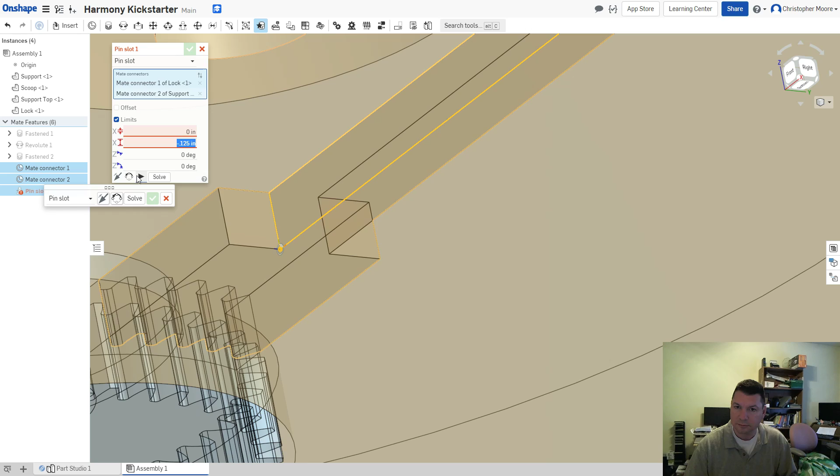Wow, okay, that is not what I thought. There we go.

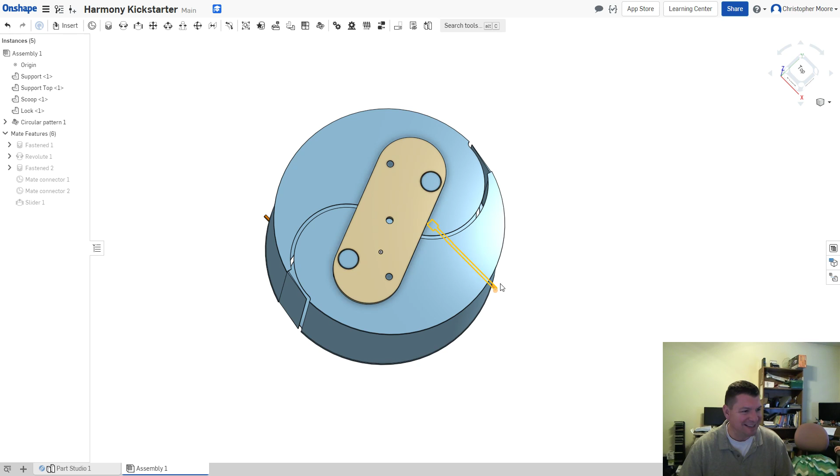Bless you. Excuse me. Bless you. Sorry. Damn coronavirus. You'd be coughing, not sneezing. Mark said it sounds like it. All right.

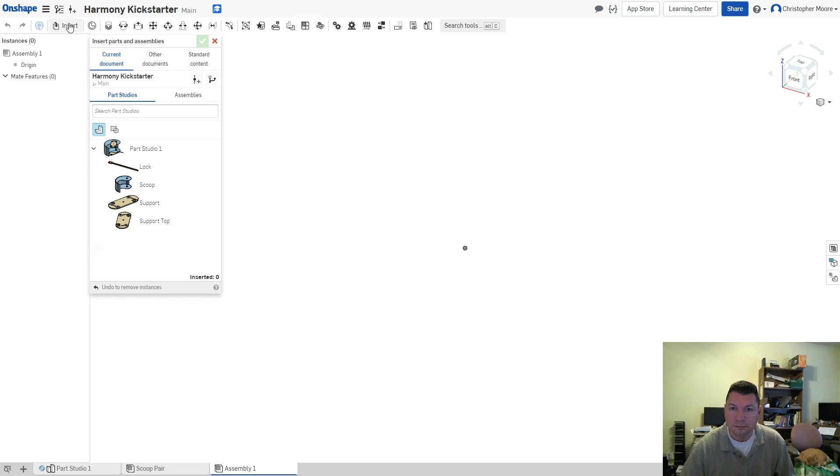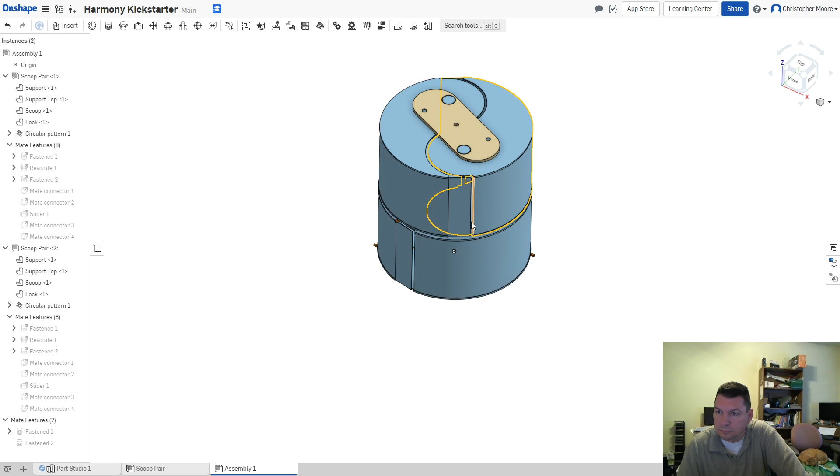Okay. Let's see how that works. That's looking better.

A variable vertical axis wind turbine, VVAWT. I like it, Frederick. Speak to those advantages a little bit more. I do like the sound of that.

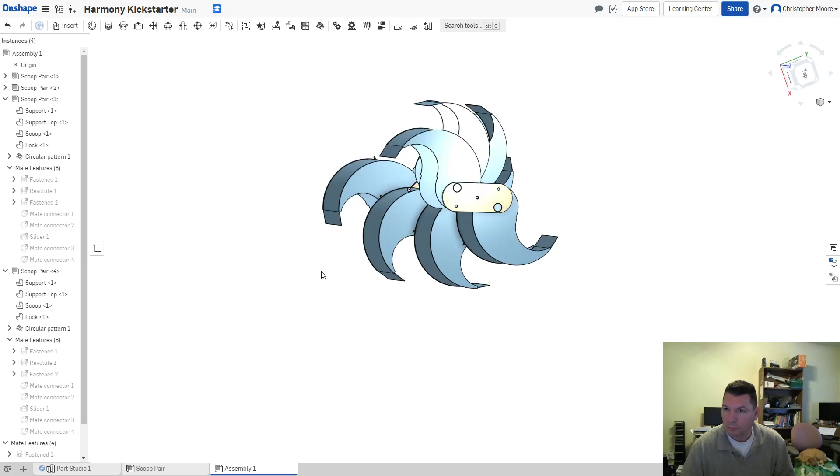All right. Yeah, if I could do a linear pattern, it would be interesting, because I could close everything up together, but this little test unit's not going to be able to do that.

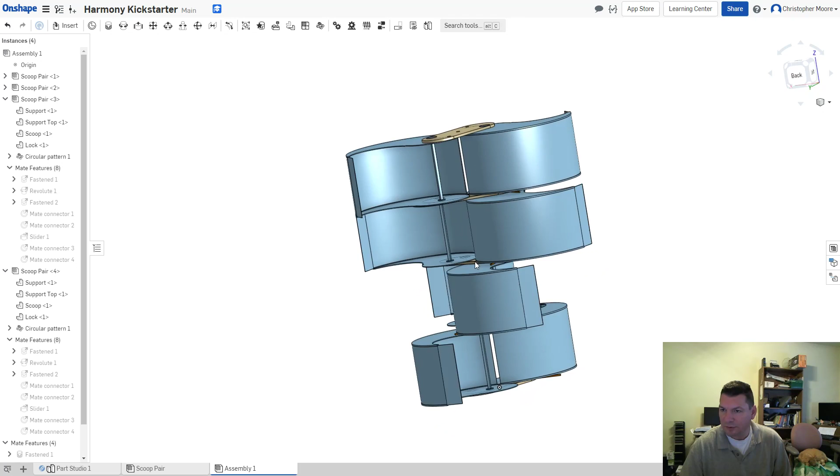And I'm not sure if I like the fact that you would have to use these sliders. I don't know, what do you guys think? It's going to allow the little test unit to have some really different characteristics than the full-sized unit, because you could have the scoops open at different angles, which really isn't going to be allowed in the full-sized unit.

But unless I have a full set of gears going through everything, which is impractical in the little tiny model, then you can't really do that.

It's funny, this one is created with the helix going opposite of how I have the big version. Each scoop, instead of it peeling away going up, I have it coming forward, which messes with my mind a little bit because it's opposite of how the big one is. It really shouldn't matter as far as performance goes, but it just is a little bit weird.

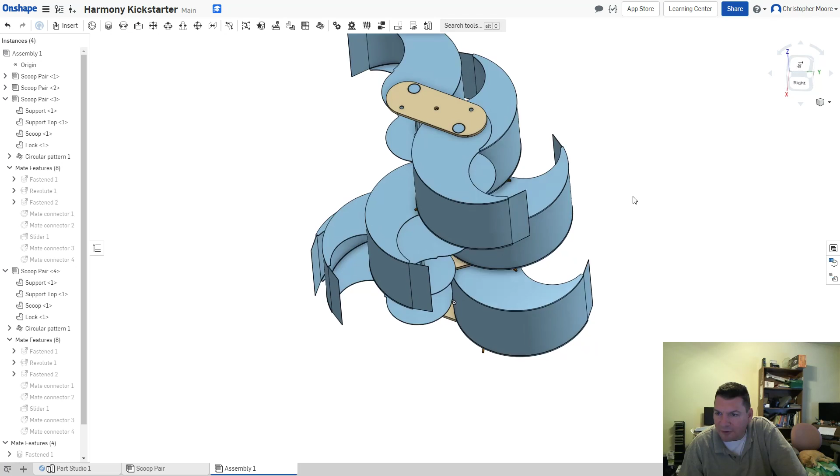So, Mark, each one has its own furling pin. You see, each scoop itself in this little model has its own furling pin or locking pin. I don't know how to do it in this little model any other way, because we've got to reduce the number of moving parts. We've got to simplify it. We have to keep this as simple as possible.

So when you think about putting this together, you would assemble a scoop pair just like this. It would be a top, a bottom, the little spindle-like lock on the top, or the circle, and the gear on the bottom. So there's a number of parts that would have to be assembled.

I can't send it through the mail fully assembled, because then, well, we could, but for us to assemble everything, we would need a much larger box. It would risk getting crushed or getting hurt. By keeping all the components flat, we can ship it in a much smaller box, keep it flat, keep what we have to do down to a minimum.

And I think if I make several good assembly videos, you could really have this assembled inside of 15-20 minutes, half hour max. It wouldn't be much to put this little model together to have your working little Harmony prototype.

I think the kit makes more sense too, Frederick, but that's why I'm modeling it here in 3D, to see, as I put it together, what makes sense. That little lock is what would keep each individual scoop set at whatever angle you want. I'd love to eliminate that, because it's a pain in the butt, that piece, but then I don't know how.

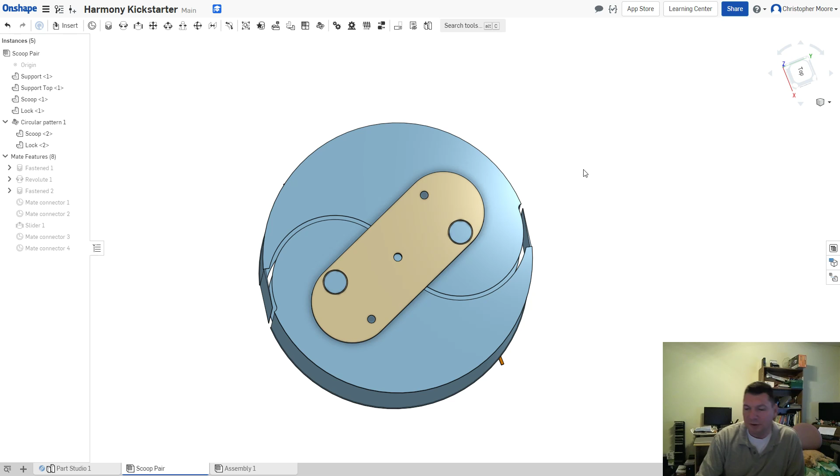I don't know how to let you guys mess with the furling. And if I take that ability away and it's just stuck in an open position, then I don't know, what do you think? Do you think people would go for it if you assemble it, put it together, and it's stuck 100% opened? You can't even close it up to take it home. Like if you're out having lunch or something, and you want to throw it in your car, the whole thing's going to be open like this.

If I take away that furling capability and just fix those square scoop separators, or the scoop support shaft - if I fix those scoop support shafts, and you've just got a square hole up here that you would put it in, put a drop of super glue on, that really simplifies the build process. You'd be done assembling it and building it, and it would just be stuck in a fully open position like this.

Stick your central shaft down through it, get in there and put a little dot of glue every place where you can get your little nozzle in there. The shaft would probably be like a wooden dowel rod, and that would be fixed to all of the scoop supports. The scoops themselves would be stuck fully opened. It would make for a very nice little rigid unit, but it would be stuck like this. It would be stuck open.

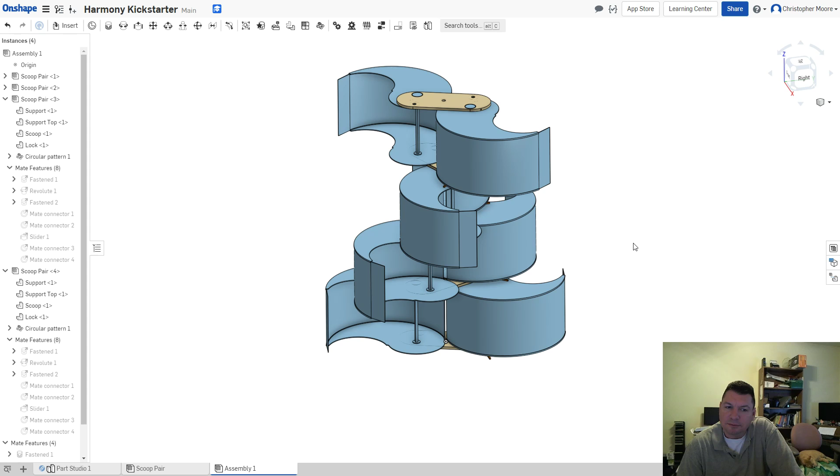Model number 1: you put it together, minimal assembly, it goes together, you just have it glued in its fully open state, and that's it. It just stays fully open, it can't furl, it can't close. And Model 2 would be the more complex, more expensive one. I don't know, what do you guys think about that?

Could we have 2 pins running top to bottom? Yeah Mark, I thought about that, but when you get into the permutations - that was the very first thing I thought of. But if you figure, you drill a hole down through right now, I don't even see where you would actually drill through, because there's no location to put a pin that's going to grab them all.

Like if I drilled down, if you can see my cursor, straight through here for instance, I'm not going to catch all 4 scoops - I'm going to catch scoop number 1, not scoop number 2, not scoop number 3, and not scoop number 4. There's so many problems with drilling a hole down through there, and if I drilled a bunch of holes, it'd be like putting a Rubik's Cube together, trying to figure out at what position you have to have them to match up with this hole and that hole. It would be like a nightmare.

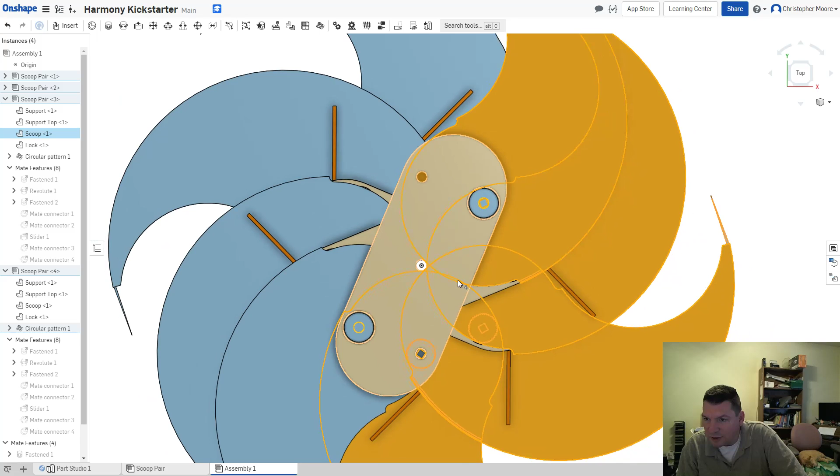I don't know, boy oh boy. They're all moving together right now because I have them all 4 highlighted. Yeah see, as soon as you start closing, now the top one and the bottom one, there's not enough material there to catch them. So now you'd lose those 2, and that single pin wouldn't work for anything but a fully open state there. There's just no real easy solution.

Make the top and bottom pin cross-shaped? I'm not sure what you're implying to make cross-shaped there. Yeah, I'm afraid the mountings... oh, okay. It still makes things very complicated, though. It wasn't that I didn't have mounting material to plug into for the scoop support or the oval-shaped piece. It's that the scoops themselves are in odd positions that a pin straight down through isn't going to really hit things properly.

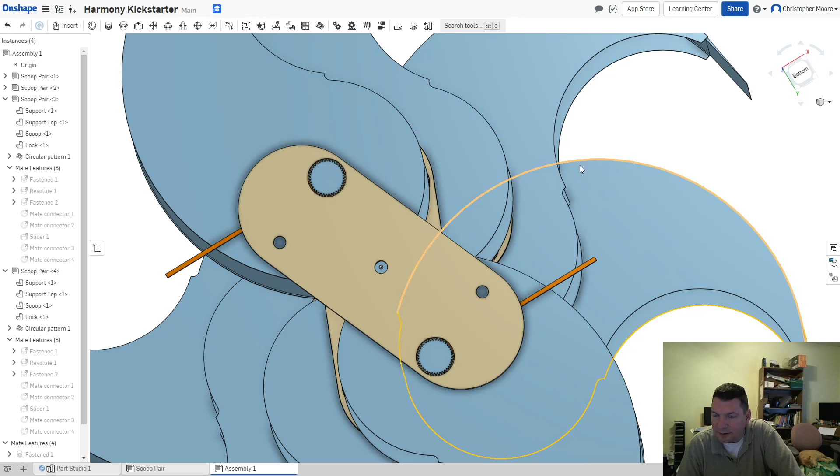I feel like it very much complicates the design to give people these little locking mechanisms to allow you to go in and out with it. When it's out, you can rotate each individual scoop however you want. You wouldn't be able to do that very cleanly, though, because you'd be kind of guessing that you've got the scoops all open to the same angle. It would...

Ooh. In the big model, it's so nice because the furling shaft and the furling gears, when they're all lined up and in sync, it takes care of everything seamlessly. I mean, the whole thing just opens and closes like a dream.

Christoph, that's kind of what I'm hoping to prove here, but until we get time in a wind tunnel and the ability to test it all, it's hard to say if it will be more efficient.

There has been data coming back from an overseas university that built a small replica. They 3D printed a small replica of Harmony, put it in their wind tunnel, and tested it. And if you join the Facebook group, you'll see that they came back saying that the efficiency was phenomenal. In the one set of data they sent back, it was 50% efficient in like 3 and 4 meter per second wind. That's unheard of in vertical axis wind turbines. Most of them are like 16% efficient.

But until I can build a unit that I can properly test, I can't get behind that data. Who knows, they could have screwed it up. They could have had the test equipment set up wrong. So that's why I was going the route of trying to get the data from the larger white model.

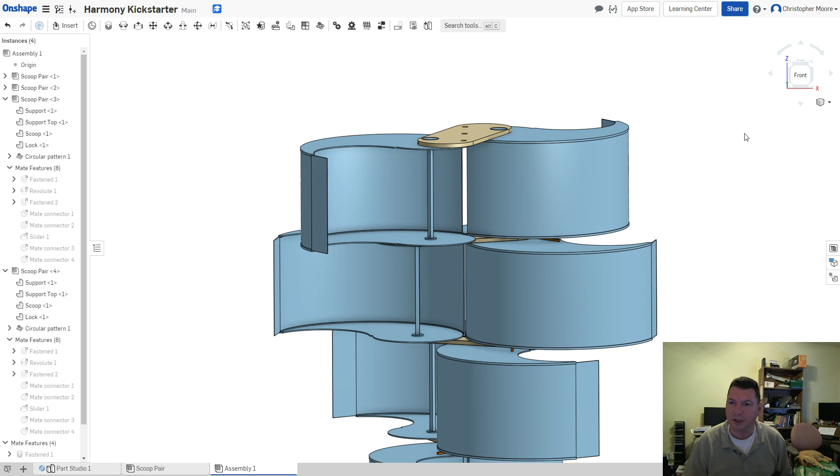They'll operate in an RPM range that's three times larger than a horizontal axis wind turbine, so that complicates things because then you start dealing with over-voltaging and all kinds of crap. I was like, man, this is going to be insanely expensive to do it on the big one. So I thought, fine, how could I get funding and do something smaller scale?

That's where I came up with the idea of doing a Kickstarter with a small model that will work to show you guys not only the principles behind how Harmony works, but let people use it as a functional test bed or minimum viable product, while at the same time generating funds for the startup.

Even this is proving to be challenging, because now I'm coming up with, well, do you assemble it and it's just stuck in a fully open position? I think that's probably going to be the simplest thing, just have it stuck in a fully open position and be done with it. If you buy another wind turbine from anywhere, it's always going to be, at least for a small model, fully opened.

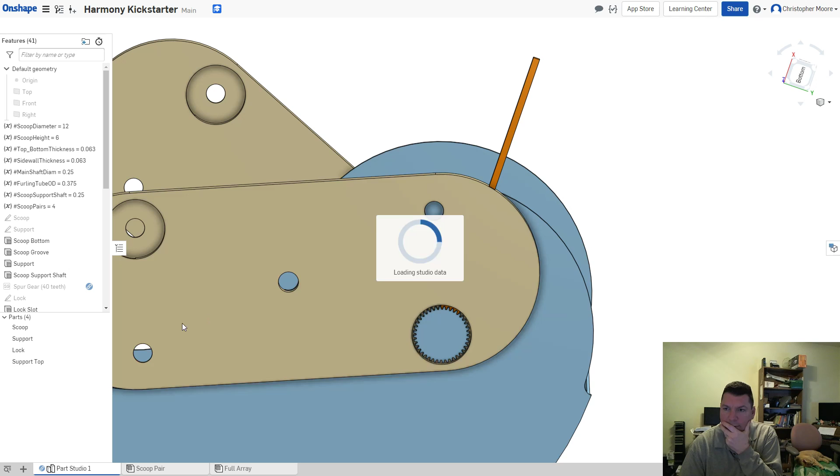It would definitely simplify this build, massively simplify this build, if you've got just a few pieces to put together. Little dot of glue here, little dot of glue there.

Right, Mark, I understand, but this is for the Kickstarter, for the small model. I don't think it's practical to be able to show that. I think, honestly, even if I put these sliding locks and stuff in it, it's not going to be able to do it automatically in the small version anyway.

It never was something that was going to be spring-loaded or centrifugally activated. It was always going to be an electronic control, which is going to require a worm gear, a worm wheel, to translate the power from a stepper motor onto that furling shaft, and then the furling gears translate to articulating the scoops. But that can only happen in a much larger model. When you start getting down to miniature size like this, it'd be crazy to build those little models with furling tubes, furling gears, actuating, furling mechanisms working. There's no way you could do that kit for

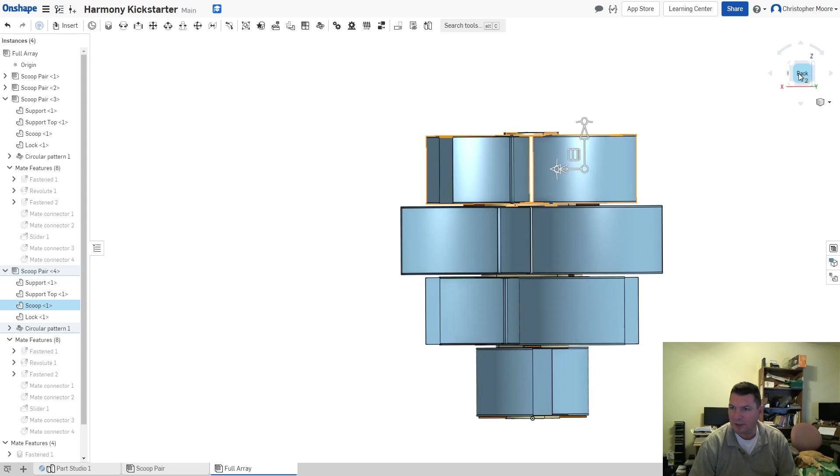Each scoop in this would be about 12 inches, so that when it's opened like this, you're looking at about 24 inches from here out to here - see, it's like 23.6 inches, so about 24 inches wide and then about 24 inches tall. So it would be about 2 feet wide by 2 feet tall when you're looking at it from the side.

It's not going to be very big. It's not going to be able to generate a ton of power. Something that small, I don't know, it's a little scary to me to think how big we'd have to go to get 10 or 12 watts of power. It's surprising how much size you need to really start getting that power. But I think 2 foot wide by 2 feet tall should generate 10 to 12 watts of power in a 6 to 7 meter per second wind. I'm hoping.

But I think for the simplicity of the Kickstarter, to make it a success, I think I'm going to have to keep this super simple. When people assemble it, it'll just be stuck in a fully open state. And I would offer a more expensive kit that would have the ability for people to set the furling state, like an expert kit, that we could sell for whatever. If the simple kit is $100, maybe the expert kit would be like $150 or something, and that way people could get the expert kit where they could change the furling state of the scoops if they wanted to. But they'd have to understand it would be a more complex build and assembly process.

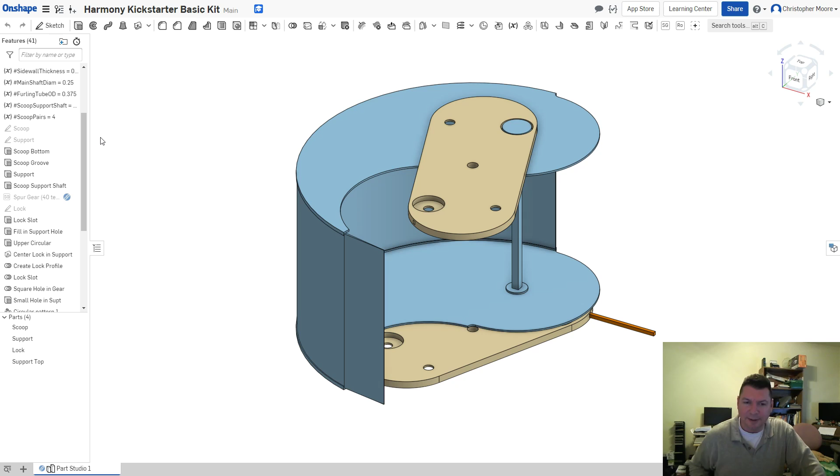When you say where's the wind exiting—have you watched the other videos of the fully functioning big white one in the wind? You've seen the little pink one spinning in the wind, and even the little tiny blue one, if you've watched the videos long ago, or the one called It's Go Time, where I show clips of the little purple one and the pink one, or the bluish one—it's like a teal, greenish blue, I don't even know what color it is. It's greenish. But all of them spin beautifully well.

So when you say where's the wind exiting, I don't know. You'd have to look at computational fluid dynamics and model it to see where the wind is exiting the scoops and how it's getting out. But I'm not worrying about that part yet. Maybe later down the road I'll worry about that.

Alright, so we're getting rid of the spur gear. We are getting rid of the lock, getting rid of the lock slot, the porthole, and getting rid of a whole bunch of things.

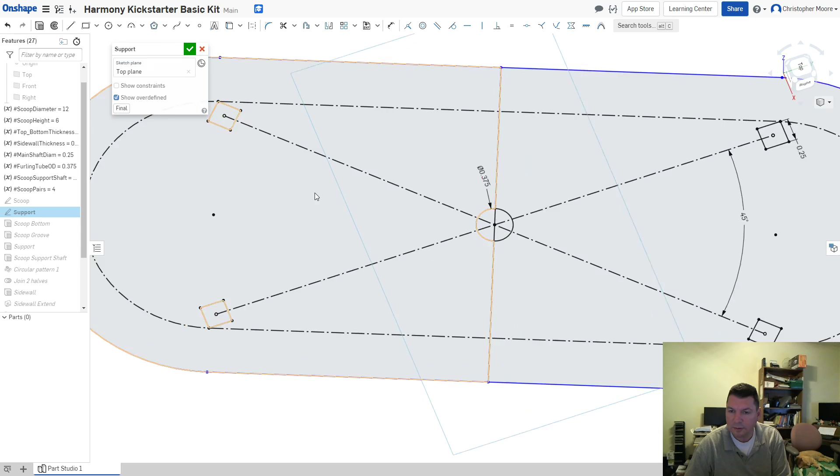Boy, does that simplify things tremendously. Get rid of that, and that, and that, and that. Wow, that really simplifies things. Okay.

I like it, super simple, easy to glue together. Boom, boom, boom. Yeah, holy cow, it won't get much more simple than this.

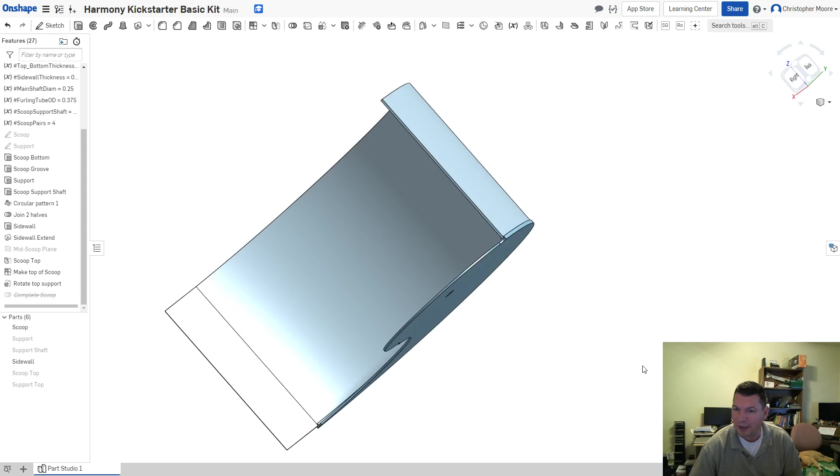So if I suppress the complete scoop and you actually see the parts, and if I hide everything, you'd have a scoop bottom in your kit, and then you would have the sidewall that you would put in there. That would just be a flat piece of plastic that is 6 inches by, probably—someone do the math on that.

What's that equation for circumference? 2 pi r, I think. So that would be in a 1 foot diameter... Yeah, 2 pi r. All right, so if that's 6 inches, circumference would be 37 inches. So I guess it would be about 18 inches. So 6 inches times 18 inches.

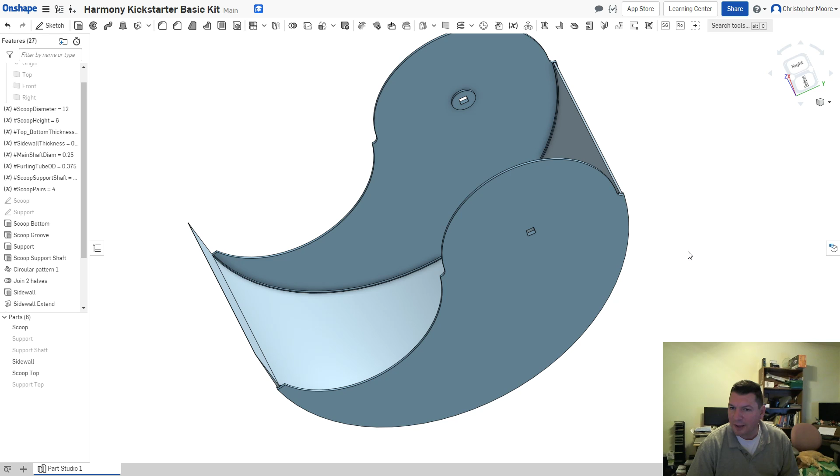So anyway, you'd have your scoop bottom. You put a few drops of glue in that little crevice—oh man, my mouse is so bad, I need a new mouse, I should get a new one here. You'd put the sidewall in, and then you would put the scoop top on, a few more dots of super glue, and now your scoop is together.

You would then put your support shaft in. I'd put another dot or two of glue here, and that one's ready to rock and roll. Rinse and repeat that 8 times, and now you have 8 scoops with their support shaft through them, all ready to go. Super easy, super simple. Then it's just a matter of assembling it—you'd have to have this opened 180 degrees to put your... here, I'll show you.

Let's make an array. You want to try and keep much the same on the basic kit as the expert kit to help—yeah, right, Mark, I would be. It is going to be the same top and bottom scoops, the sidewall material would be the same, all of that would be the same, the scoop support shaft would be the same. Definitely, it would reuse all of that stuff.

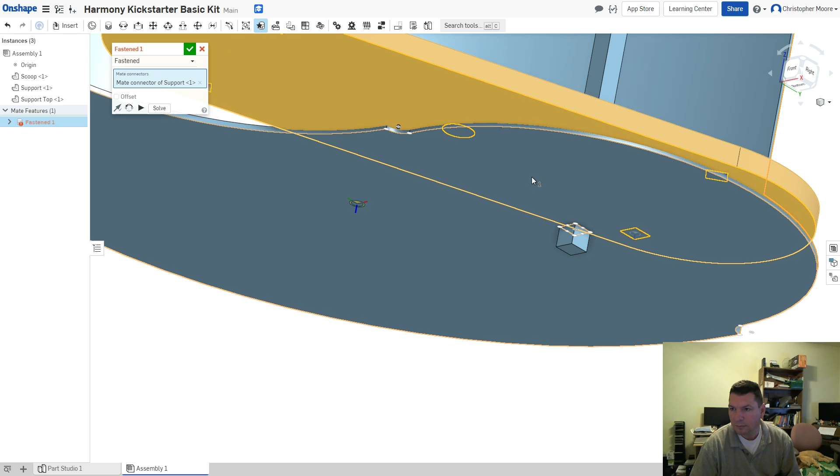I'm going to unsuppress this and insert a scoop, a bottom, and a top. Mate connector of the support... whoops. Need to put this on the origin, not of the scoop.

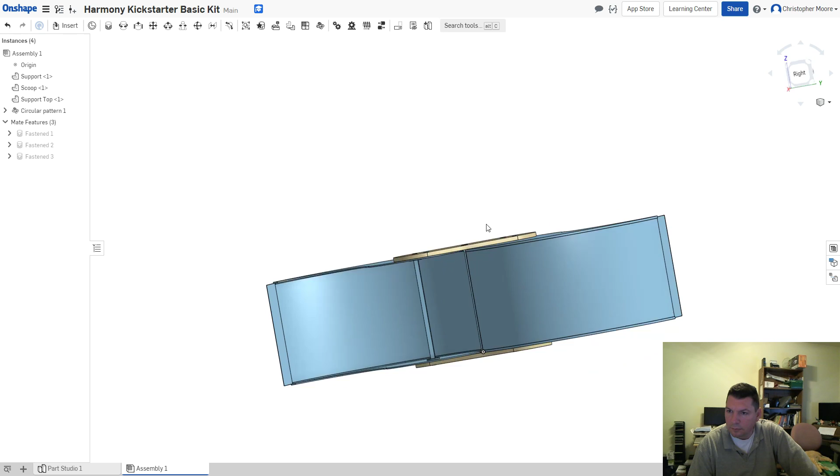So the most complicated part of the build will be helping people understand that when you insert the next scoop pair in, it gets glued into those two holes, when the scoop is done in an opened 180-degree fashion like this. That's pretty much it. Each scoop top doubles as the scoop bottom for the next pair above it.

I like it, simple and clean. Do that 4 times and you assemble it. I think I'm going to go downstairs and start printing this version.

Yeah, Frederick, we will have IKEA-like instructions to assemble it. I'll do a nice build video, an assembly video, and maybe include some printed instructions for people so that they can follow along. Keep it simple. But really, it's just a couple things to glue together, and it would go together nicely.

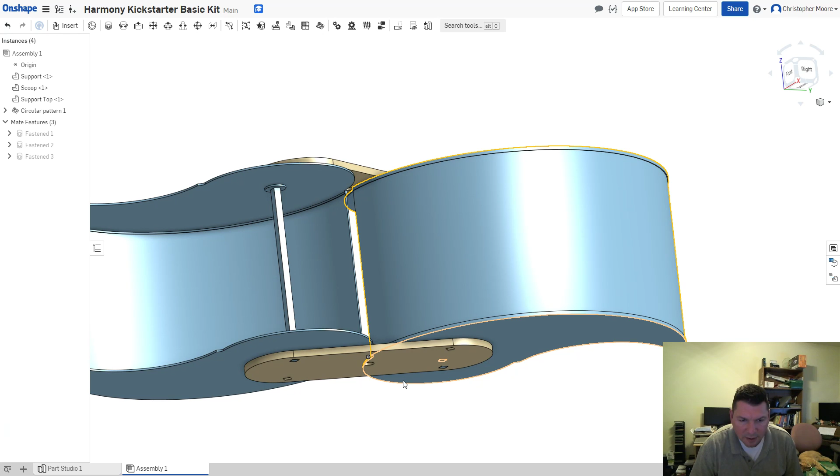I like it, that is so much less complex. Basic kit would be very, very simple.

Be interesting to see if you had the helix going one way, where each scoop is in front of its pair on the bottom, or if you had it where each was behind, if you'd get any difference in performance. We'll actually get to test that out when we build these small ones.

Probably, I'm going to guess that having the wind peel off the top will be more efficient, because if you're pushing the air that's being pushed off of it, like flutes on a drill, towards the ground, I don't think it'll exit as cleanly as pushing it up into the air. So you'd probably want each of the scoops to be in front of the next one as they're opened. Starting at the bottom, when they're opened, you would want the next scoops being behind its pair that was below it on the bottom.

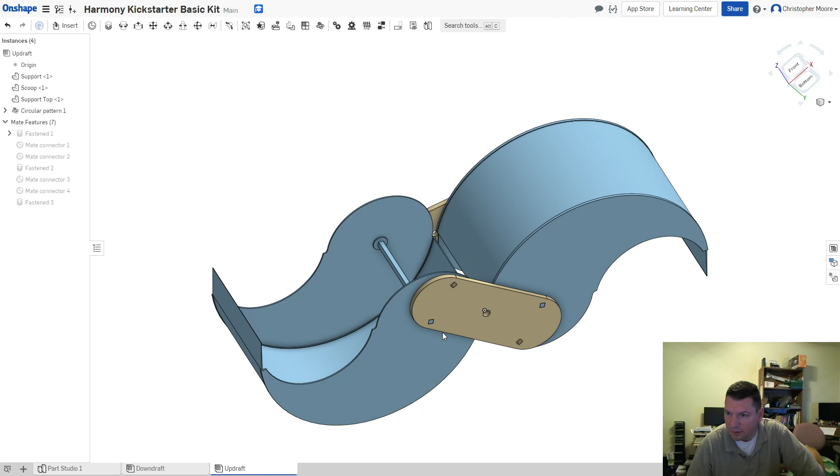However you look at it, whether you're looking at it from the top or bottom, it's always going to be the same. So if I do the updraft version...

There is a program out there I've been looking at, called ANSYS. I haven't downloaded it or bothered with it yet because I'm not sure how complicated it is to use, but it's possible that software would allow me to take a look at things. But it could be months and months of a learning curve, and I've already got so much experience with CAD work and 3D printing that I can easily have these parts printed and ready to go here in short order. And in the end, a computer model only gets you so far anyway. Practical, real, true testing is really what you need.

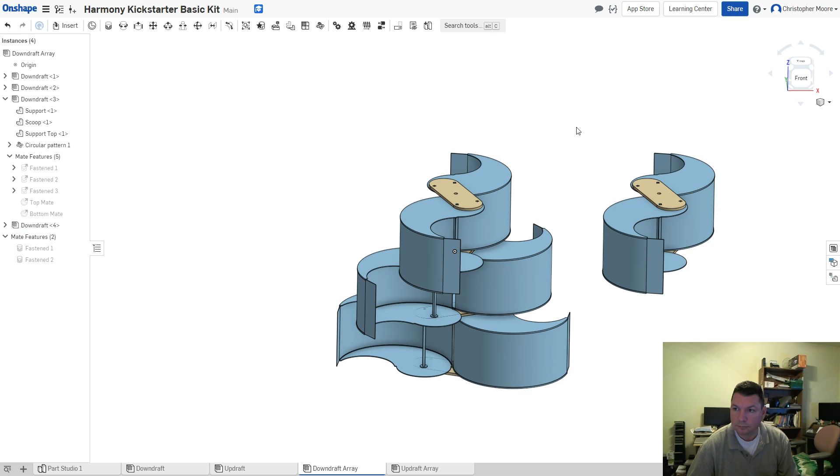All right, so that is a downdraft version. I don't know, maybe I have them named backwards. As this spins, maybe that's the updraft. Maybe I have them named backwards. I don't know. Okay, so that's the one.

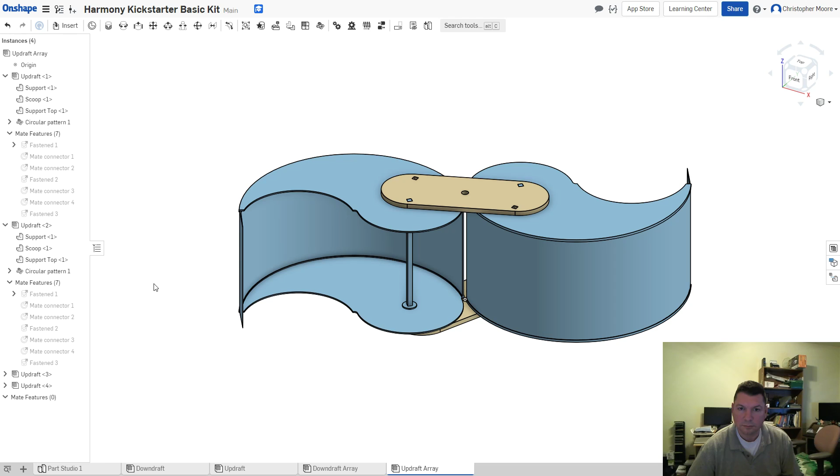It's interesting. All right, and then here is the updraft version. Guess it would help if I'd put the mate connectors in.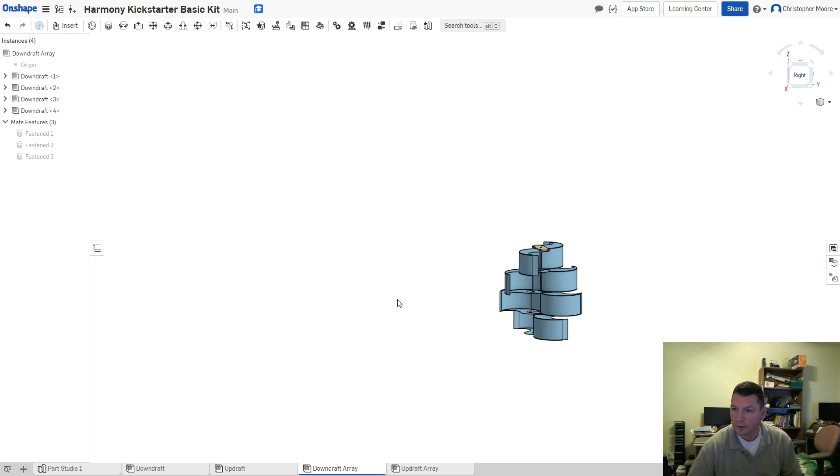Downdraft version, or I don't know, maybe I'm calling them the wrong thing. Each of the next scoops grabs the wind as it's peeling upwards. Hopefully you can see that. And in what I'm calling the downdraft, yeah, it's peeling downwards. So maybe I've got them labeled wrong.

Maybe this one would really be the downdraft. Yeah, it would be pushing the air down probably. So this is the way Harmony, the big white one that I have, is done. And maybe it's kind of interesting to think maybe it's wrong. Maybe I need to switch the way they're doing it, because I feel like it's pushing that air downward.

So I'm going to rename these.

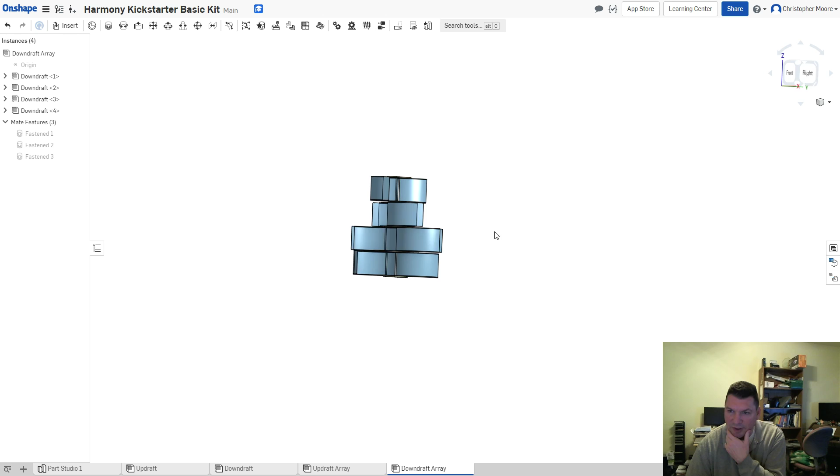Yeah, I feel like this is actually pushing. I don't know if you guys can see that as I spin it, but if you can imagine the wind hitting and being caught by each successive scoop, it will be sort of pushing the air down, I think. I don't know. Maybe it's pushing it up. It's really hard without smoke or something like that, or computational fluid dynamics, to determine what it is doing.

But it's opposite from this one, even though they both spin in the same direction. It will be very interesting to see if they perform differently because of the way the air peels off the scoops. This is the same effect as the Venturi effect fluid turbine, how it spins. Boy, it's really hard to say which one will push the air upwards or downwards as the helix finishes.

So Mark, if you'd take away the top and the bottom of the scoop, you'd just have the back walls. You can imagine just the back walls. As this would spin, the air would be hitting this scoop, this top one, and it'd be getting pushed in a downward direction. The air would be coming in and hitting, and then getting pushed downward, because as it overflows the scoop, if you think of it filling up like a cup of water, air is a fluid, and it would get pushed in a downward direction.

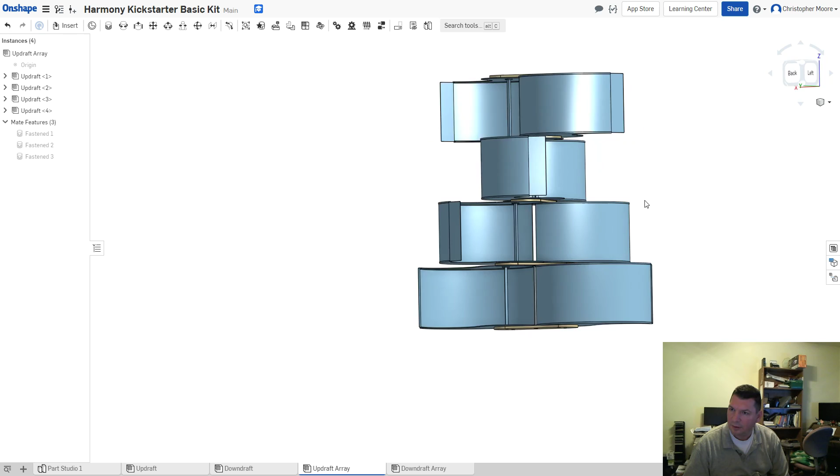So Frederica, you think this one would push the air in an upward direction? I don't know. I'm thinking if you eliminated the upper and lower parts of the scoops and just had the back walls, as the wind would hit this, it would be deflected downward. And I think this one, as the wind would hit it, it would blow upwards.

This is the way I have the white version of Harmony. So when it spins, at any given moment, the air is probably being pushed up into the air as it hits and overflows each scoop. If you start by the bottom scoop, air is pushed up. Yeah, you're behind a little bit now because I've moved on to what I named the downdraft, but I actually think I have these named backwards. I should have kept them named what they were.

Yeah, I think I've got them named backwards now. We'll rename these. So I think I had them named correctly the first time.

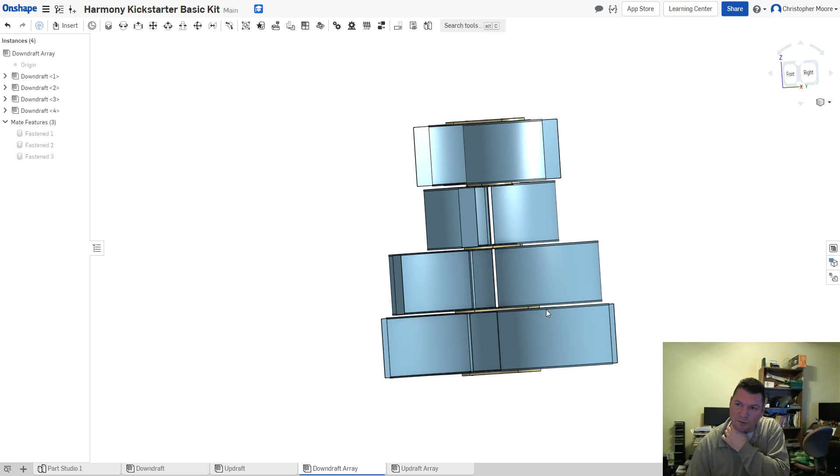And this one, it almost looks wrong for my mind to see this one because it's opposite of how I have the white one down in the basement, the white residential size prototype. It's hard for me to look at it because it's opposite of that one. It's really strange for me to see this, but I think if the scoops were oriented this way, as the wind would hit it, again, path of least resistance, I think it would hit it and travel downward each time as it's spinning.

I think the air would be pushing down and you'd be getting ground effect, like helicopters have to deal with ground effect air as they're too close to the ground. Their swash plate and the downward draft of their air creates interference because it hits the ground and smashes the air and it moves outward. I think the ground effect, as Harmony is spinning here, would create some kind of interference. Whether that would be beneficial or not remains to be tested. But yeah, it's kind of interesting thinking about it, whether you want that air peeling off upward, skyward, or whether you want that air peeling off downward.

So do both. We'll make both and see if there's a difference, if you get a noticeable change in the performance just by which way the scoops are oriented, because we could certainly use that to our advantage when making the larger residential sized one. But it just deals with how you have the scoops glued into the scoop support.

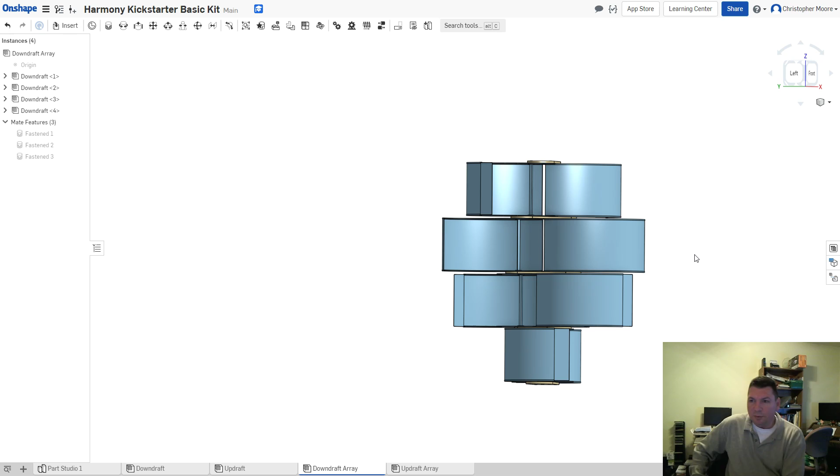Yeah, very interesting. Okay, so I think this would be the basic kit. I believe that's a really, really simple part to print. I don't even need the support top or bottom. It's just a scoop top, a scoop bottom, a sidewall. The sidewalls will not be printed.

They'll just be cut out of thin, 16th inch plastic material, about 18 inches long by 6 inches tall. And then the scoop support shaft, the square scoop support shaft. I really think that's quite a nice, easy little kit. For the basic kit, I think that's actually beautiful. You have 3 components to assemble, 4 if you count putting the scoop top and scoop support on the top and bottom. But yeah, not bad.

All right, what do you guys think? Ah, what the heck? Oh, I know what I did. Unsuppress. That was scary.

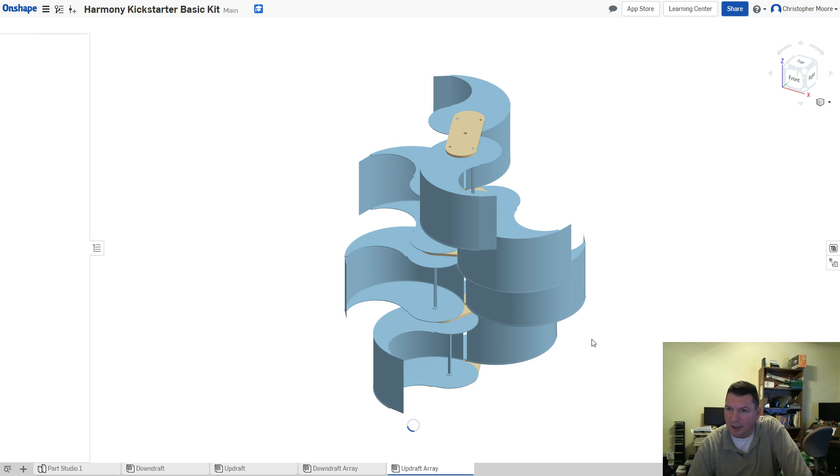Yeah, I think this is the way to go. It's just going to be stuck in an open position. Who cares? Any other wind turbine you'd buy for testing purposes, a small unit or something, it's going to be stuck in a fully open state anyway. It's the expert kit that would allow people to play with it if they want, change the furling states, but it's a far more complex build. This basic kit, I like it. Man, it's dead simple. It'll go together quick for people, and it should perform well for them.

Yeah, Mark, you're talking about how it would be good to see if the updraft or the downdraft would make a difference. I would be very interested in seeing those results as well.

One of the things I struggled with, guys, was trying to determine whether or not I should have 3 segments for the little test unit or 4, because that also makes a difference in how complicated the build is. It's just one extra set of components. I think we'll be okay with 4 of them, so I'm going to keep it 4. Sorry, I'm yawning. That was one of the things I was looking at, whether we have 3 of them or 4. But I think it's time to get some scoops printed.

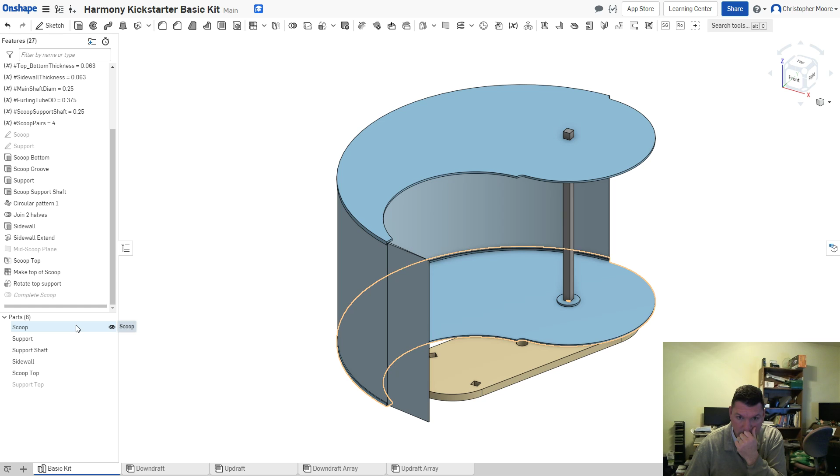Okay, let's export. We're going to call this basic kit, basic kit scoop bottom. There's the top. Support and support shaft. Okay, they're all exported.

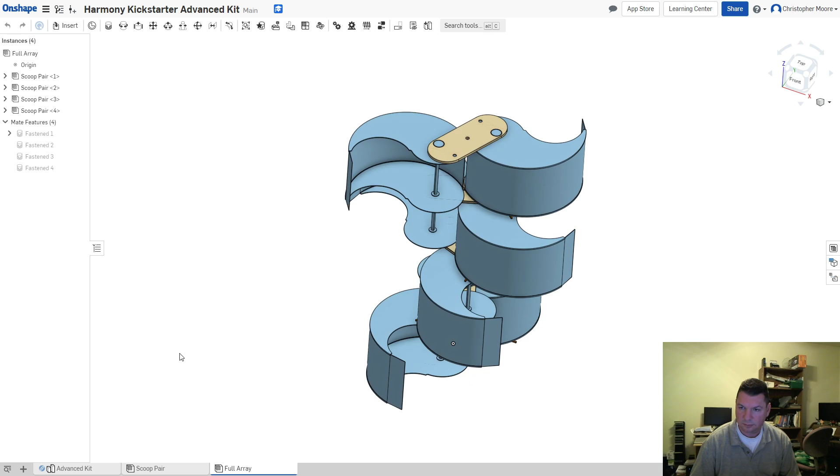I'm not even going to bother printing the advanced kit right now, because until I determine whether there's an advantage to the updraft or downdraft, that will definitely play into where I have that locking mechanism and all that stuff on the advanced kit. So we're not even going to mess with that.

Okay, maybe we do these one at a time. Scoop bottom. Oh, that's why, scoop top, see how tiny they are. That was what happened.

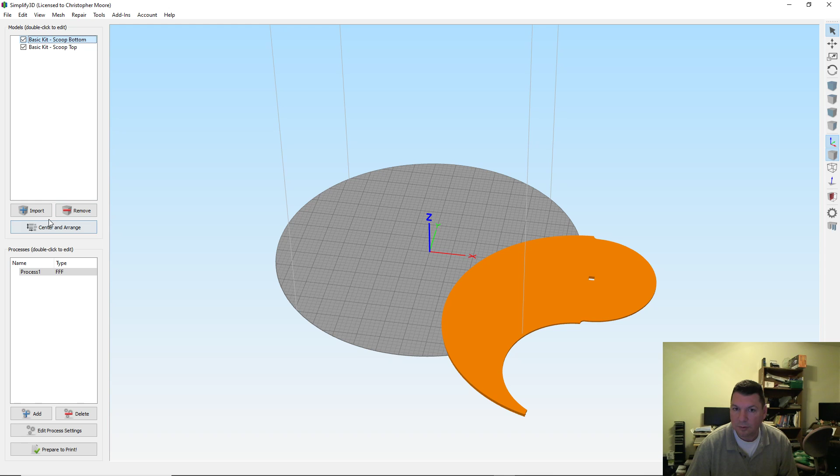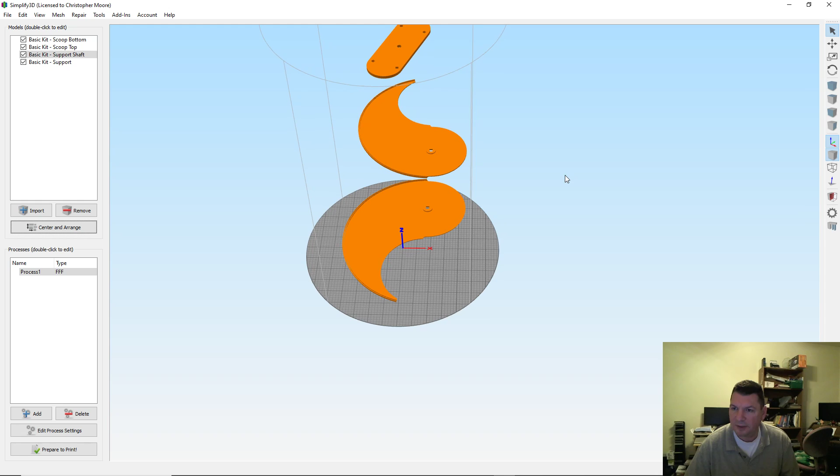Okay, well, we are okay. There we go. These are going to be big pieces. I don't know if I'm going to be able to print. Yeah, because the top and bottom meet up the same way. Wow, I won't be able to print the tops and bottoms together. When we send these off to be printed, that'll be, yep.

We'll let the printers worry about that. Actually, if we get huge numbers of orders, we'll, I don't know, we'll worry about that when we come to that. Huge numbers of orders are a good problem. All right, so maybe we can't do all the pieces at once. I do have multiple printers, but then you get into whether or not the parts are identical enough that they can all fit together.

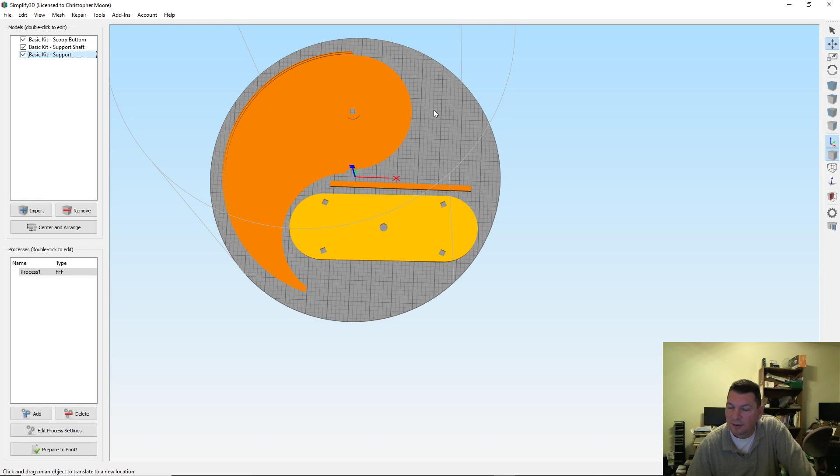We're going to do fast, 10%. No support material. Okay. 5 hours. Holy crap. 5 hours? Oh my gosh. Wow, that's crazy.

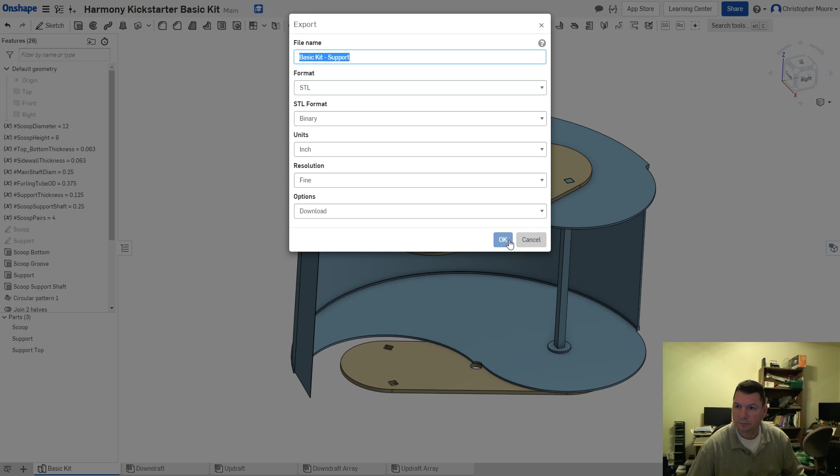I don't have a place to sit. Oh man, he stole your seat.

That's okay, just share. Okay, there we go.

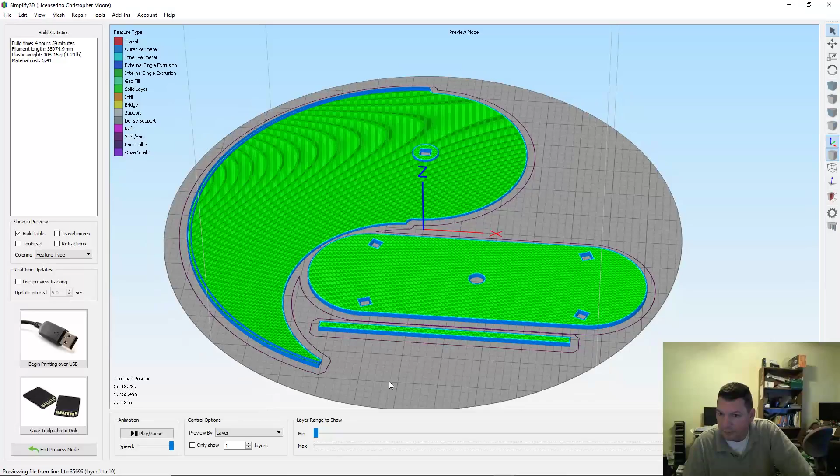I guess I'll let it print just to see what we come up with. Those sidewalls look like they're doubled, so that's good. That'll give them a little bit of strength.

Okay. I can't believe that's 5 hours. It's only 10 layers thick. That is crazy. So detailed or fine? No, no, is it huge? It is big, yeah.

I can only get half of the components. Man, that's going to be days to print. I'll get one printer doing one set and another printer doing another set, and we'll just have to crank through them that way.

On my 2 biggest printers, I can probably print, but 10 hours of printing for one set, if I catch it right at the change, and then another 10 hours of printing for another set. Times 2 printers going at once, so that's literally 40 hours of printing if you single thread it all. 40 printer hours of printing.

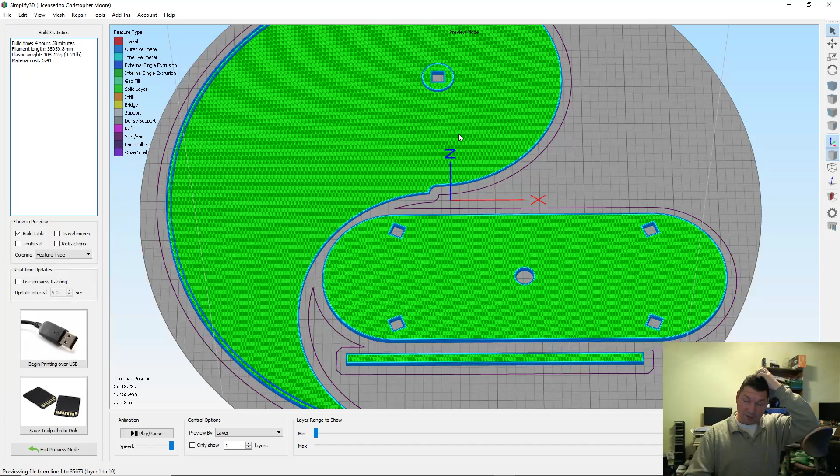I really appreciate the support. And it made, believe it or not, it made the design process a lot more enjoyable. It probably also made me, holy cow, it probably also made me keep my nose to the grindstone a lot more.

Wouldn't you say, hun? Yeah, I think it did. It had the end result of keeping me focused.

Well, we can watch Star Trek after I get this print going.

Yeah, anyway, I'm going to set this up, and then the other printer that I have, we're going to save that toolpath. This will be BF11. B is my second printer I got, the Tevo Little Monster.

And yeah, we'll just leave this named Scoop Bottom, Basic Kit Scoop Bottom, because the other three things will be a scoop top, another top support, and another scoop support shaft. So 3 more components, but the mirror image of them mirrored on the z-axis. So that's that one.

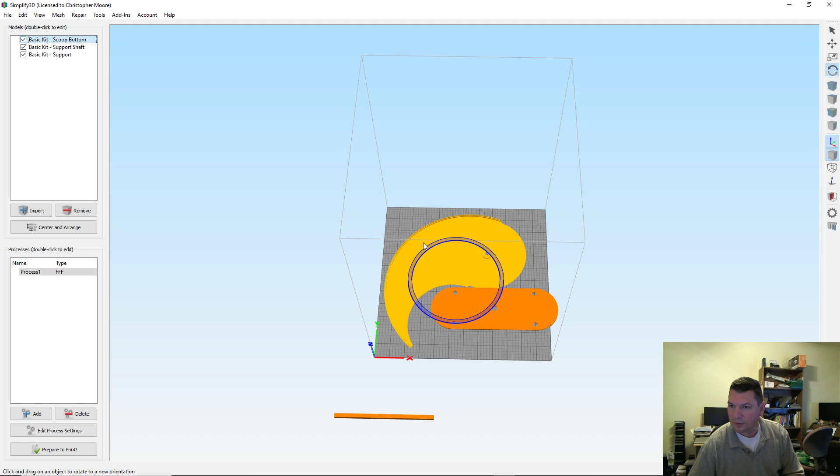Wow, I thought if I can't get this sucker on here, that would suck. Okay. Whoo. There we go.

You know what? I think I have to resave the other one because I think that support was halfway into the platform.

So this is my C printer, CF. We'll just do 20, Scoop Bottom.

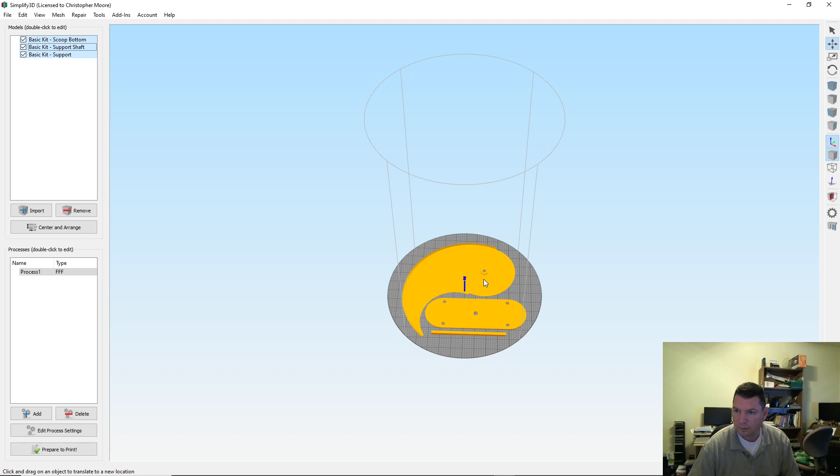Yeah, when I saved that the last time, it didn't.

Okay. There we go. Part of that scoop support was in the build plate at first, but that's correct now.